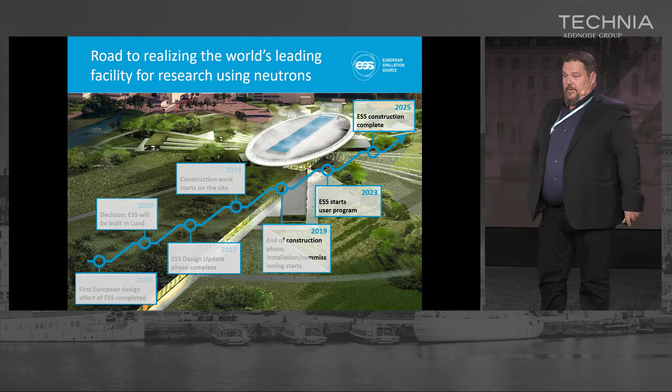Our hard target is to start the user program in 2023. We will be doing research before that, but from 2023 on, there will be a schedule. There will be users coming in from all over Europe, probably also other parts of the world, to do research, and that means the facility needs to be up and running. And 2025 is when the construction should be completed altogether. Then the plan is to run the facility for at least 40 years-ish, and then eventually one day decommission it, we think.

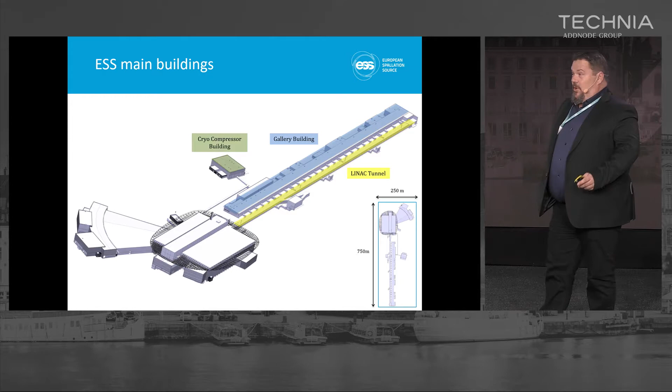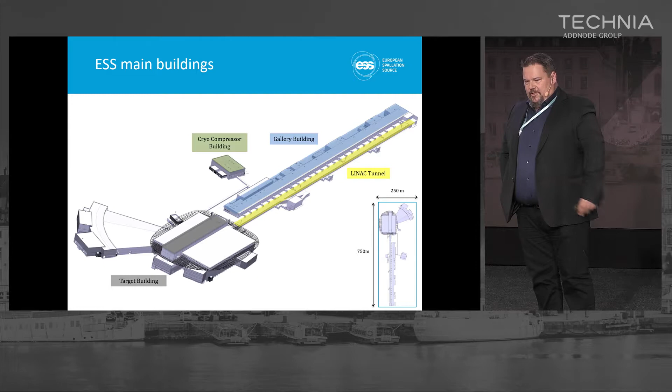So it's a pretty big facility. It consists of an accelerator tunnel where we have a proton accelerator. We have a building along the tunnel to feed. Basically, that's all to power and run the accelerator. We have a cryocompressor building where we cool down helium. You guys talked about helium before. I think there are 18 tanks, about 10 meters tall, of helium. If anyone needs to blow up some balloons, just come visit, no problem. From the tunnel, the protons will go into the target building, hit a wheel made out of tungsten, I'll come back to that, and generate neutrons for these instruments.

So this is the science level that I managed to do it on. We have other people who do this much better. We have an ion source in the beginning, which is the coolest thing. We have an ion source. I mean, come on. And it's up and running, or until we broke it and now we're repairing it, but it's up and running. We have a proton beam going through a superconductive accelerator, or parts of it are superconductive, to generate a beam power when it reaches the target of an average power of 5 megawatts once it's fully implemented.

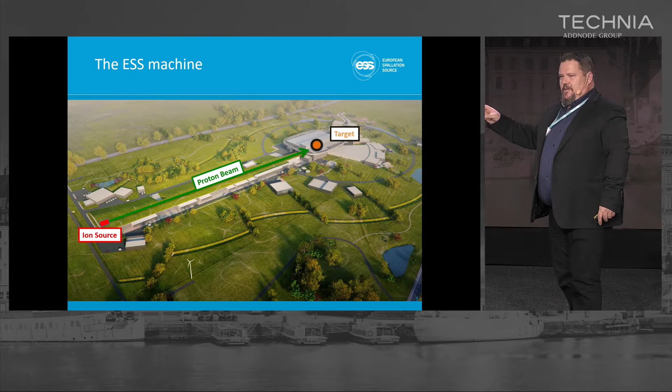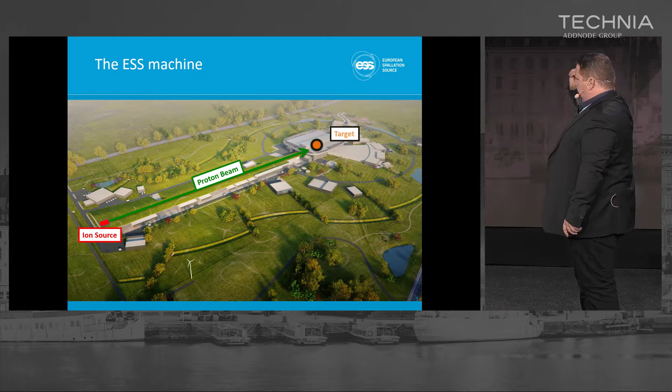It hits the target. The target is a wheel made out of tungsten, and it's rotating. The reason it's rotating is that when this proton beam hits it, if it wasn't rotating, so we had time to cool it off, it would melt very quickly. The actual hitting of the wheel knocks off the neutrons. That process is what's called spallation. The neutrons bounce off all over the place. We try to guide them out to the instruments where the actual research takes place.

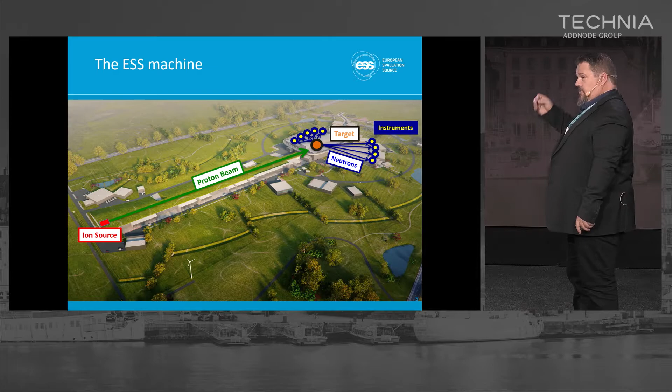So everything up until that point is basically just a microscope. If you look at something in a microscope, you're using the light, and the more light you put on, the better you can see things. If you X-ray something, you use that radiation to analyze something, and it's the same thing with neutrons. And the reason for using neutrons is that they are charge neutral, so they don't stop on metals, for example.

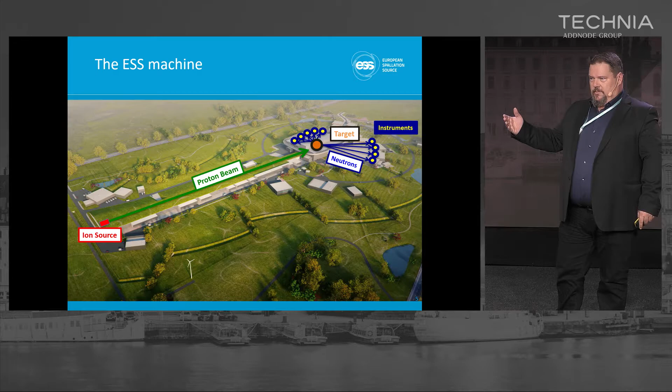So now this is going to be really interesting. I'm going to show you a little movie. We have a drone with a camera flying over the site. The last time was in July, and the build is 60% done. Most of the buildings are in place. At the very end there, we're starting to erect our main offices.

And this is basically the beam direction. So I'll see if I can do this. You don't see that pointer. I'll go point. The accelerator tunnel is here, and goes into the target. So right in the direction of the beam, we will put our offices.

We're pretty sure it'll be all right. At least we hope so. But at least we will be the first to know if something goes wrong. Next will be Lund, and then Malmö, and then Copenhagen. Nothing important, but we will be the first to know.

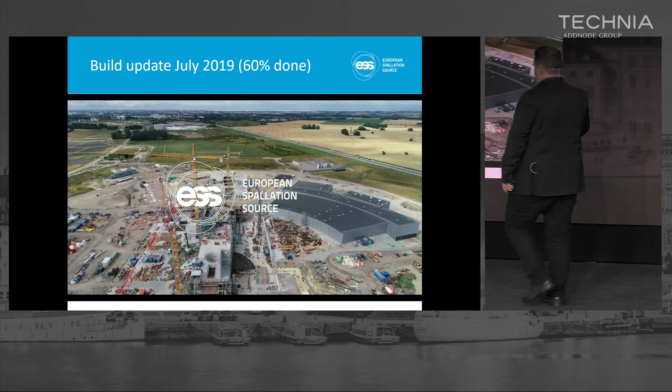Yep. See where it stops here. So I'm just going to use the fact that the movie stopped. In this little cylinder here, which is 12 meters in diameter, is where we will actually have the target installation with the target wheel in the middle. The wheel itself is 2.5 meters in diameter. And you can see that here's where they're going to be guiding out the neutron beams to the different instruments. And everything has to be super aligned.

The tunnel is 600 meters long, and the floor in the tunnel deviates plus minus 1 millimeter. So that's something for you guys from GIM to bite into. Okay, so how do we do this? We're using 3D Experience. We're still on 2016X. We're using both ENOVIA and CATIA. We were quite early adopters. We went live in 2012 with 2012X, and then 13, and 14, and then 16.

We're coordinating all the design in what we call the EPL, ESS plant layout, and that also means that we import from the other tools into 3D Experience to visualize the complete facility, because we really do need to do that for integration purposes. We also need to communicate from this, and I'm going to talk a little bit about the Remove Invisible tool later, and that's one of the things that enable us to actually export useful reference models as well.

Inside 3D Experience, we have broken down our facilities into different structures to make it easier to navigate through it, and also to be able to create links depending on which approach you have, where you come from, so to speak. How do we connect the different tools or the different views for the users?

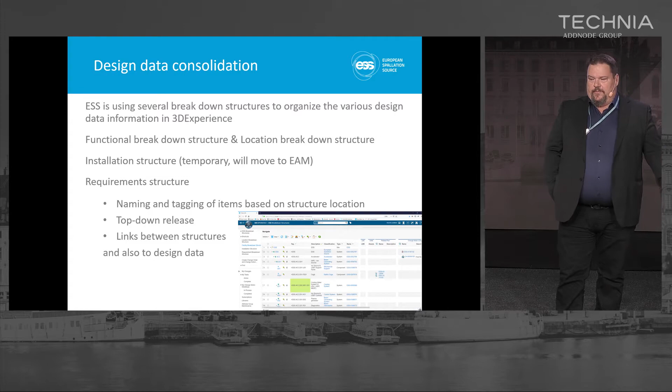A little bit of the challenges, of course. Quite a few of our partners are actually using CATIA, most of them V5 though. And since they are labs, research facilities, and so on, quite a few of them are using academic versions, which creates some issues for us. But we integrate, and we have quite a few that are actually working now on remote through our 3D Experience platform using VPN, and it's working pretty well.

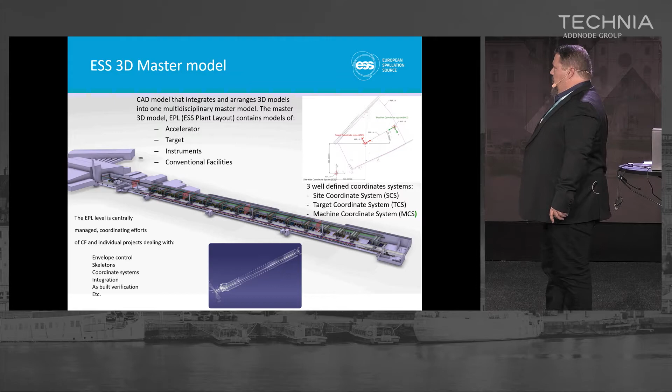Of course, we have to coordinate this. As I mentioned, we have our ESS plant layout. We have skeletons, of course. We use different coordinate systems to identify where on site we are. And our master model is quite big. I'll come back to that in a bit. So, as a tool to manage this, we're using Remove Invisible. And how do we do that?

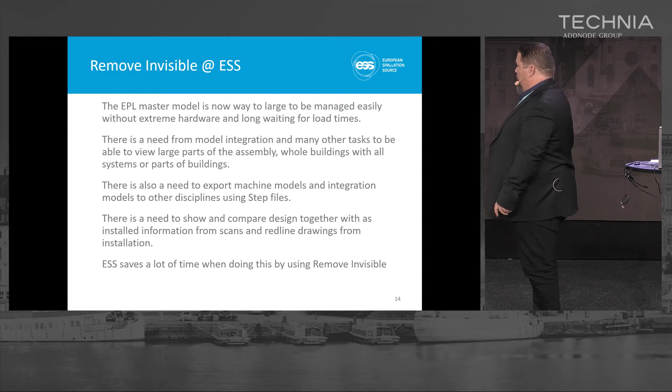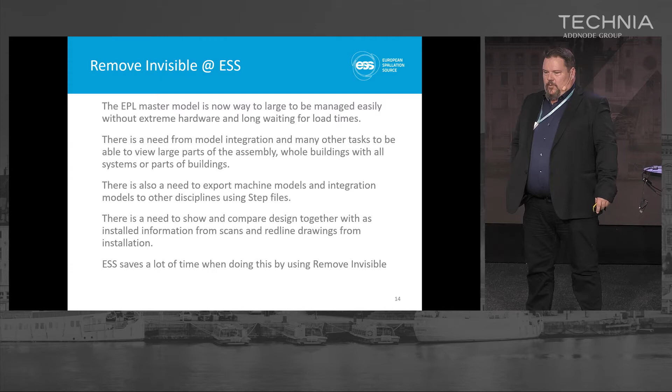Well, in reality, our master model is really large. It can't really be reasonably loaded. We need, of course, to do integration. We need to make sure that the design we receive from other facilities fits. We need to be able to have discussions around layout, where to place things. And we need to communicate it out as well.

So this is the panel from Remove Invisible. I'm going to talk a little bit more about it in a bit. What we do is that everything that we store is numbered ESS and a number. You can see that here as well. Let's see, where are you? I'll just go points instead. So ESS and then just a serial number.

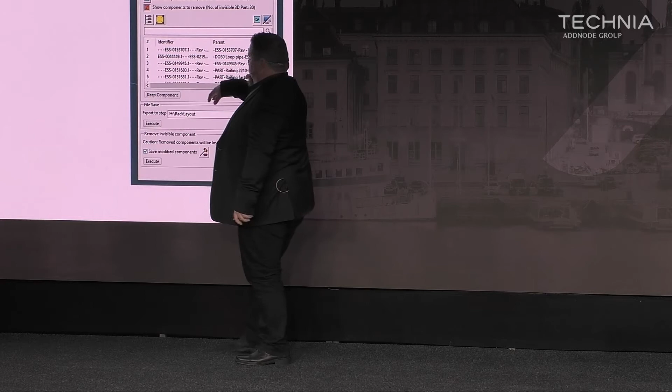Of course, when we run the Remove Invisible tool, one of the principles is that it removes the parts from that assembly. And as we're working with the database, we still want to save that lighter assembly, of course. That's the purpose, to be able to reuse it, but we don't want to overwrite it.

Because that would be a very nice way to mess with your colleagues. Oh, by the way, I ran Remove Invisible on your assembly. 60% of the parts are gone. I owe you a beer.

So we set some restrictions about how you can save the new assembly, who's allowed to do it, and to maintain the original structure, of course. And the user can also directly from this create a STEP export.

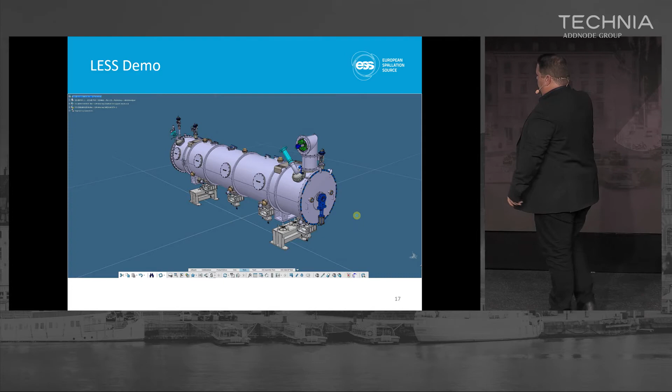I'm going to see if we can make it look better than this in a second. There we go. This is one of our assemblies. This is a cryo module, and it contains quite a few parts, about 8,000. It is a vessel through which the beam goes, and it adds more power to the proton beam as it goes through. Inside, it's cooled down to 2 Kelvin, and it's got ultra-high vacuum. So the tolerances on this stuff are pretty hard, and there's quite a lot of very detailed design going in there, so it's quite heavy models.

So we're running Remove Invisible on this to see how we can lighten up this model, and I'm talking while it's doing this because it's actually doing it real time, just to give you a feeling that it takes me some talking time, but it really doesn't take that long. And of course, the purpose is to analyze this and say, okay, what's covered up? What's inside? What can be removed to make this one lighter?

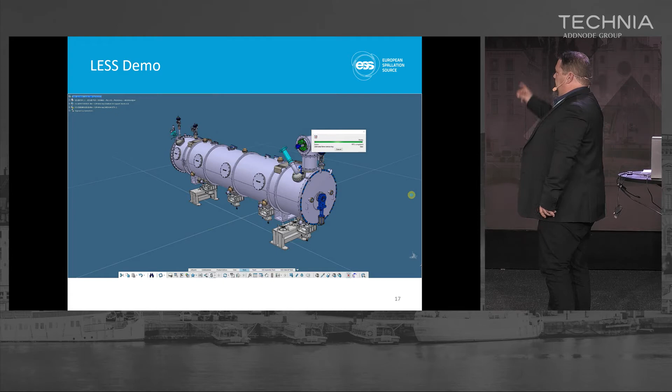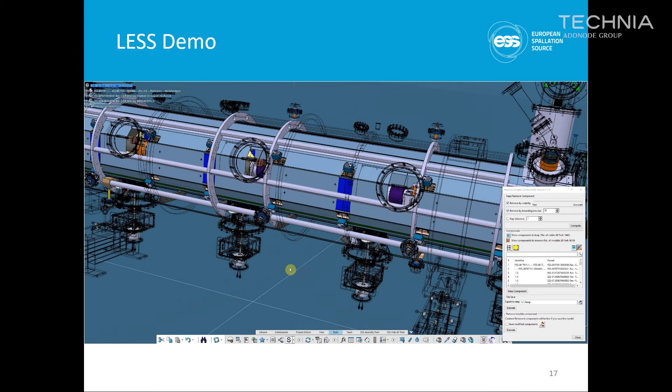And so first it does a computation, and then for some reason it has to go down and collect the window. I've been doing this so many times that I'm not trying to do it live. We're using video. Okay. So here's the result. It has computed 1,400 and something visible parts, 6,500 parts that can be removed. That is a significant saving. And I need to save some time.

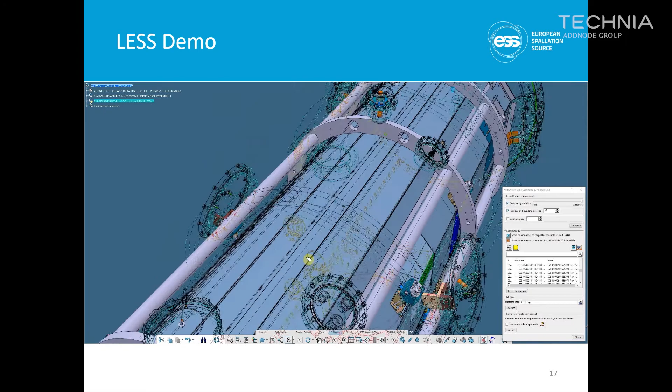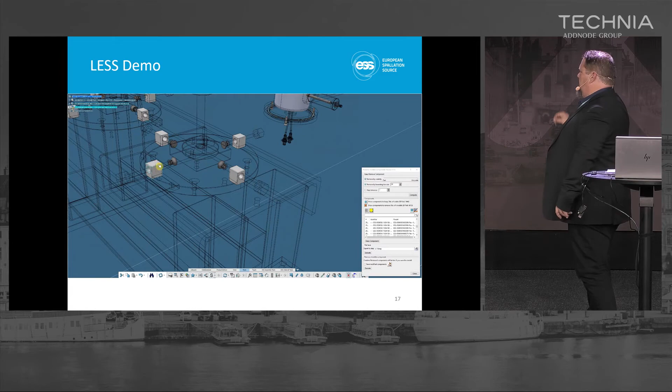In this mode, you can see it highlights everything that will be removed, and you can switch that back and forth. You can select an individual component and say, no, I want to keep that, or no, we can remove that as well. And I think, even if it's a little choppy now, being able to do this on this level, this is a large assembly, is pretty good. And once it's done showing us things that we can't really see anyway, it will then execute it. And it's really fast. I'm going to get ready.

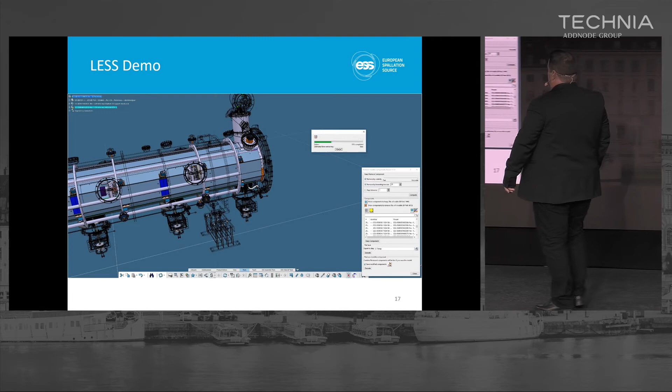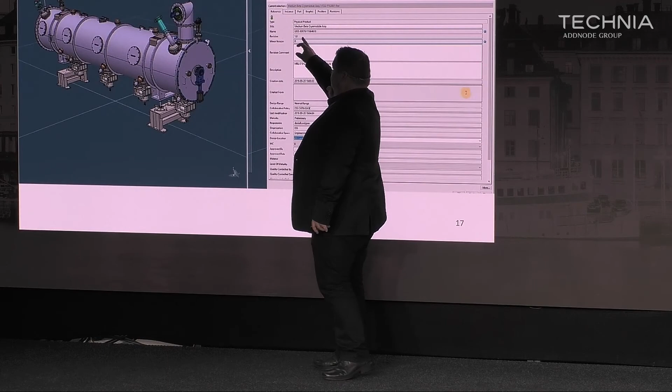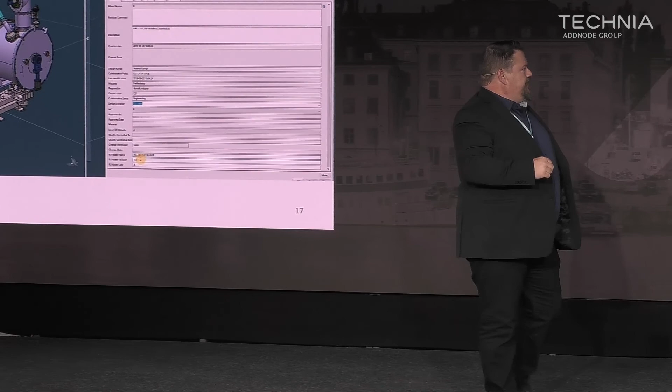So here we have the new structure and the original structure. And what is done to keep them apart is it kept the name, you can't see this, I know, but trust me, it's the same name, but it added an L in the beginning. And since we had ESS before, you can figure it out. And it retains a link so that if you're working on the light structure, you can easily say, okay, I want to bring up the real stuff because I want to make changes.

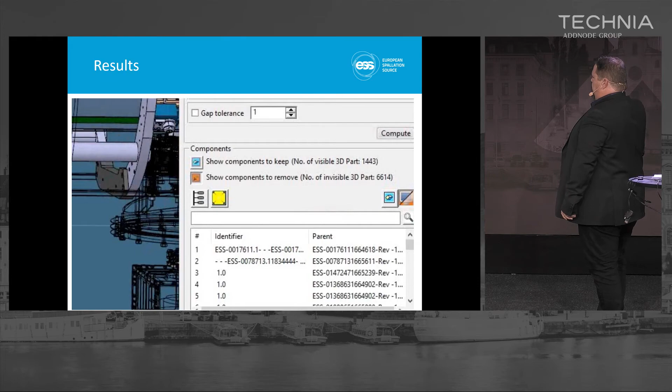Yeah, I think we'll skip this video there. So just a quick recap of what you couldn't see on the video. 1,443 visible parts and 6,614 to hide, at least. And of course, this is part of our, you see the ESS, it says European Spallation Source up there. So this is our lightweight layout. This is the copy with only the slimmed down data.

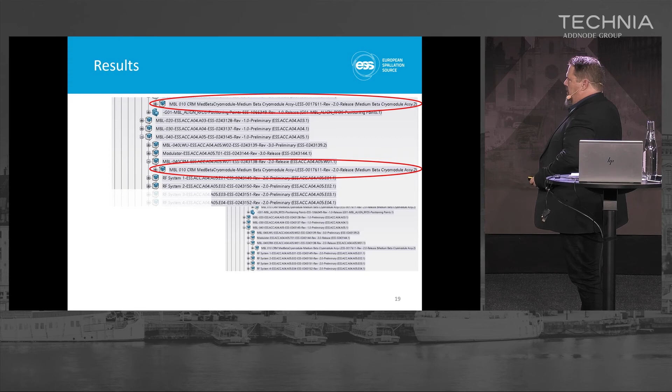Zoom in a little bit so we can actually see that it's there, but it's also there. And it's instantiated 22 times. So by running this, we save about 150,000 components that we don't need to load in our large assembly. And this is on one design. We have a lot of things that are instantiated even more times.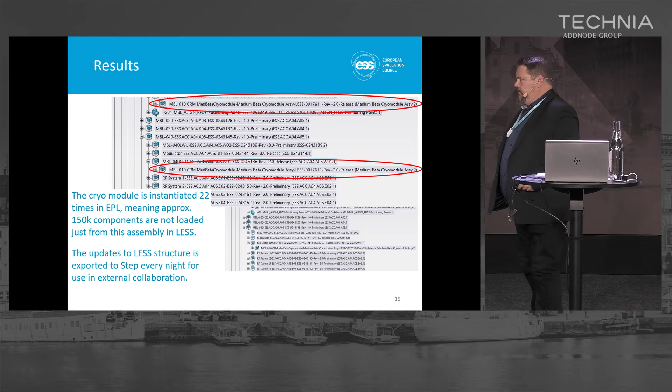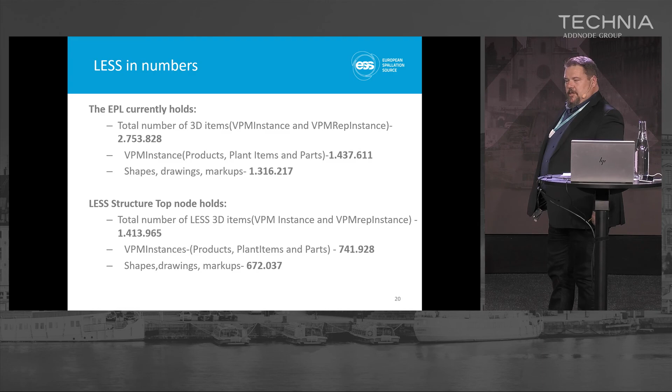Here's a little bit on the numbers. The complete layout at the moment holds almost 2.8 million parts, 2.75. And the light structure holds almost exactly half of those. So this means that we can actually manage it in a decent way without having to buy horribly powerful and expensive workstations.

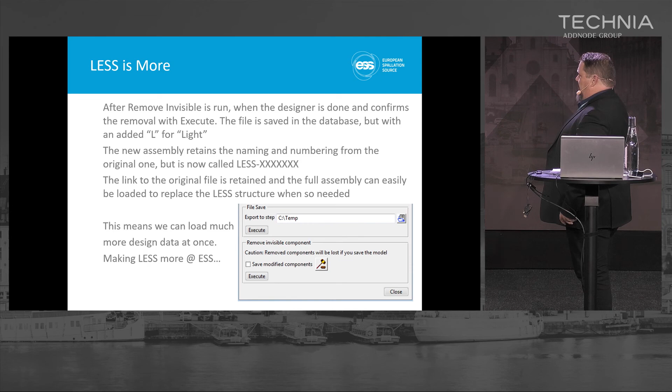So after you've run the remove and everything else, it's automatically saved in the database, and it automatically adds an L for light, retains the rest of the numbering, and that's why less is more.